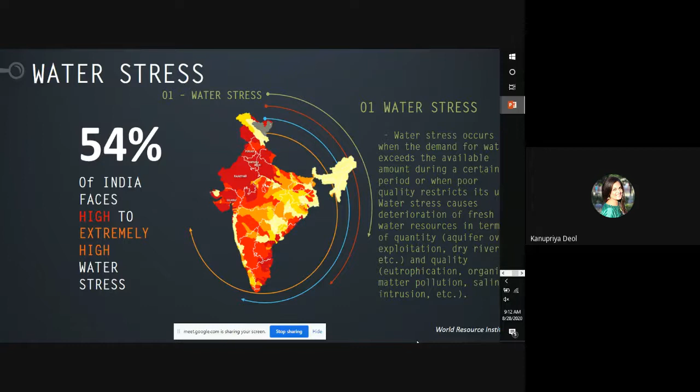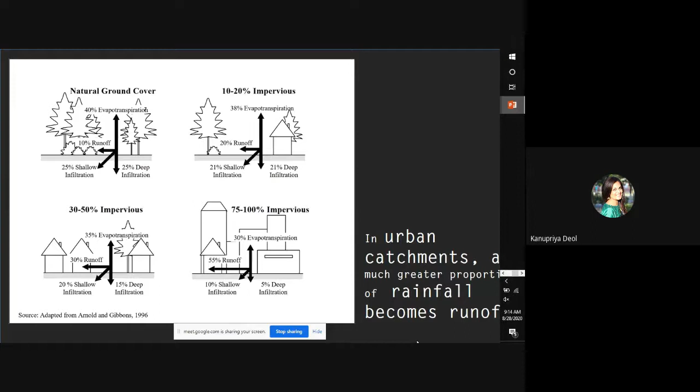With planning, when master plans are proposed or zonal plans are proposed, the proposals are given at a very policy level, but the funding for those infrastructure proposals or development plans is a greater challenge for implementation. Having master plans has been there for us, cities have started coming up with master plans or even DPRs, but with the funding, that is the problem. We haven't yet come up with solutions which are also cost effective.

So that is one implementation challenge we're having. So with these techniques, the focus is also on the funding part.

Coming back, when we have at least 75 to 100% impervious areas, 55% of water is lost in runoff, and only 5 to 10% water goes into infiltration. So the runoff percentage, if you see, the more impervious area, the more runoff. This water which is runoff is lost water.

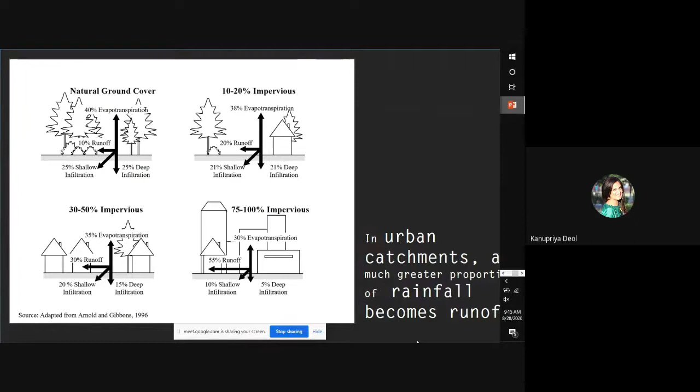So in urban areas, the catchment has a greater proportion of rainfall becoming runoff. We are not able to tap this water. It becomes a nuisance for the city. We have seen flooded urban flooding pictures in Jaipur, Gurgaon, and many other cities. So this becomes a nuisance rather than becoming a resource to us.

Looking at this scenario, there's a need to shift from what is happening currently to a new kind of paradigm, a new kind of approach.

So where water, rather than having a single use, we need to have multiple uses of the gray water and black water. There's a need of reclaiming and treating the water, and probably not for your drinking purposes - probably it is not potable water - but we can use it for other purposes like washing your cars, horticulture, and even street washing.

So regarding water quality, the first major thing is to treat water to potable standards given by CPHEEO.

And then second is, in this new kind of approach, we have to use the right water for the right use. This is something we talk about when discussing sustainable development, smart cities, or having 24/7 water supply - the right water for right use, like there is probably no need to use clean clear water for washing your cars.

Then wastewater is another major thing - it is not to be passed on after one use and just sent back to the environment, dumped in the rivers or dumped in the drains, but rather taken into a loop. In environmental terms, this is called reclaimed water.

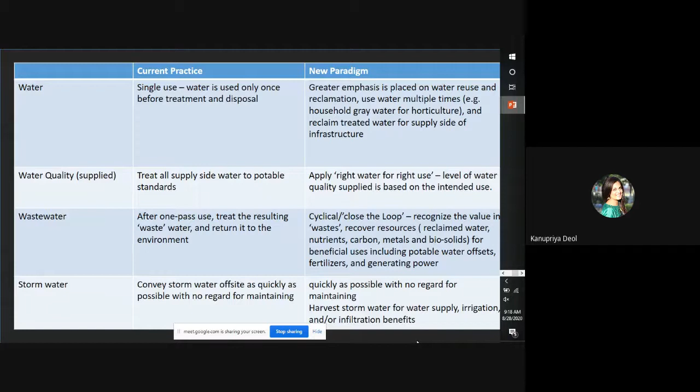This is given by Centre for Water Sensitive Cities, CRC Australia. This is a pioneer institute working towards creating water sensitive settlements, be it on a neighborhood scale. It says that there's a transition framework for every city - every city can be categorized into six phases, and every city passes through these phases.

The first being where you have excess of water, the population is low, the water sources are very readily available, be it surface, be it ground, be it a combination of the two. Then the second is the sewered city, where we come up with separate sewerage systems for public health protection, because with excess use of water, given that when you have too much at your disposal, there is a tendency to waste it.

So then comes the sewered city. Then comes the third phase, the drained city, where in case of Indian cities we did not come up with the framework of designing whether we want a combined sewerage system, a separate sewerage system, or a partial combined system. So in those cases, drainage became an issue. The natural drainage of the city was not given due consideration while planning the land use. The land use came irrespective of the natural drainage of the city, and so urban flooding was a scenario that comes up in a city. The built up density of the city is inorganic in nature.

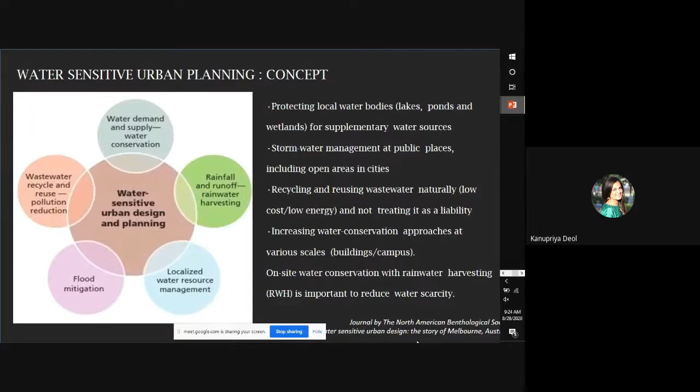Then if we look at how we can achieve it, what are the various components, it's a combination of some sustainable techniques, urban planning techniques, and landscape design. An integration of all these techniques leads us to managing the water cycle and contributes towards sustainability in urban areas. That is what we are striving for. Our plans, our reports, our design aims and objectives mention sustainability, 24/7 water supply, green techniques, green infrastructure. So this is how we are working towards it, this is how things can be achieved.

And the minute we say that we have to ensure a 24/7 water supply for our cities, provide to the standards of 135 LPCD per person -- so these are the various techniques. If I pick up one or two, it again says the same things: keeping in mind the environment, protect the surface water bodies and groundwater. It has become very crucial to maintain that natural balance in the surroundings we are living in, to restrict the use of certain water bodies so that they are not over exploited. But the minute we restrict, we also have to find an alternative technique to overcome or maintain the supply and demand.

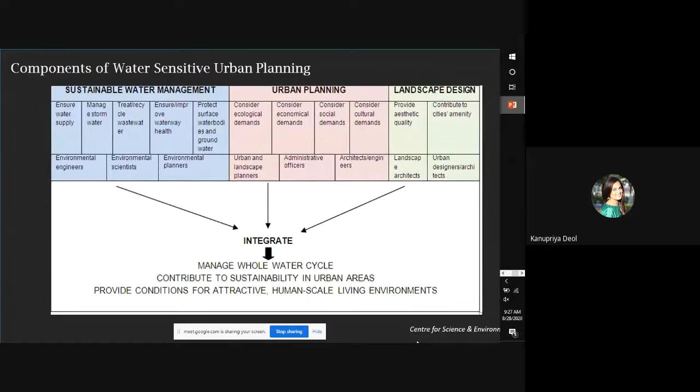So this particular concept is very site-specific. It has to be very sensitive towards the demands and aspirations of the people, and not force or impose techniques over them. At the same time, the techniques we provide should not spoil the aesthetics and should contribute to the assets of the city, without putting up extra maintenance or operation costs.

So if I sum up the entire concept, it is an approach to reduce the potential impact of new and existing development with respect to surface water drainage discharge. The first agenda is to tackle the surface water drainage discharge, and the second is to integrate and optimize the use of available water resources. It focuses on one thing: that we should not look for new sources. Through our design and planning, we should be able to optimize what we have at hand rather than just saying, I'm going to go buy a new one.

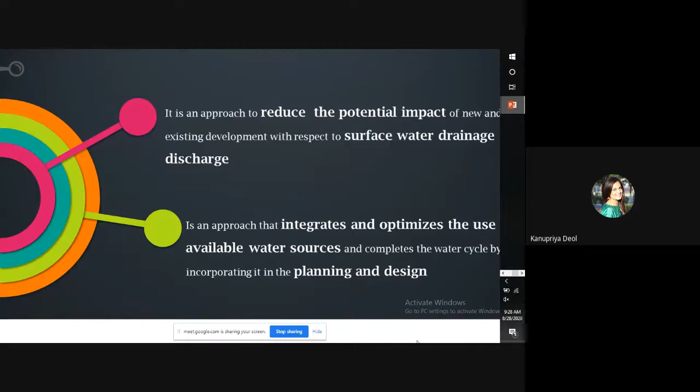Now, working on the principles: consider the receiving waters. We have to break the connection between impervious areas and areas which receive water, use stormwater as a resource, and maximize the benefit. I will explain it further.

This is when we say that we need to respect the sources of water. We need to know that if your water is coming on a slope, in upland areas the buffering capacity is very little. It does not have too much space to meander, and the change in flow and concentration is heavy, it is sedimented, it is under flow.

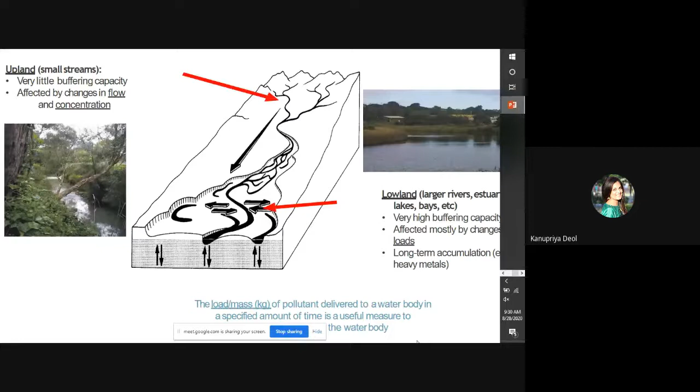So to tap that water, we'll have to construct dams and check dams for these smaller streams. So we wait for the water to come into a little lowland where there is a high buffering capacity. We can store water there, and the heavy metals or sedimentation have already taken place. Depending upon the location of the site or the settlement, we have to see where the water is coming from and what kind of water supply is available for the city.

Now, separating impervious areas from the receiving waters - when we give our planning considerations, the design should be in such a manner that your impervious areas somewhere or the other meet the areas where water can seep in.

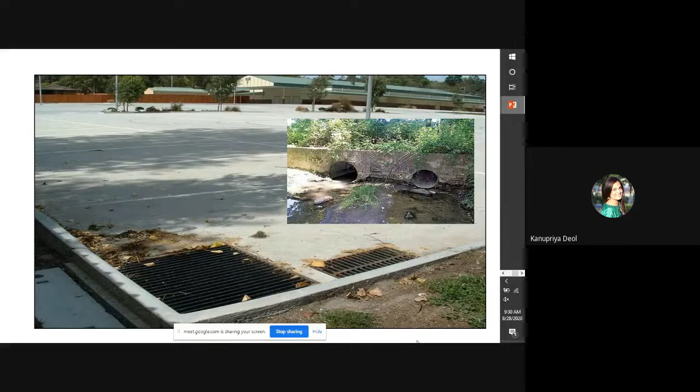And even if there's a complete pavement, there is something called pervious pavements. Civil engineers have come up with the concept of pervious pavements rather than going with traditional pavements. We have to come up with areas where your impervious areas can be efficiently used as pervious areas. If not to the maximum of their capacity, a certain percentage can be used.

Then the third principle says we have to restore the urban water cycle. What comes in is not wasted, and a forested area, which is by default natural, is able to maintain this. But the more the urban area penetrates into forested areas, the dynamics of that place change. Over time, the flow of water which was there initially reduces with the built-up area, and we have to use methods like infiltration and irrigation to preserve this runoff.

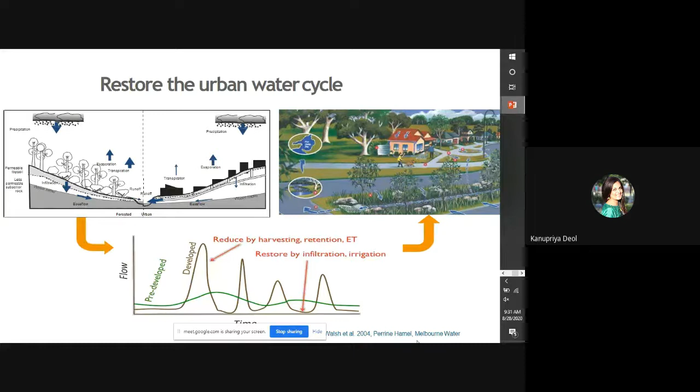Now, when we say it has to be a benefit, there are three dimensions. It has to be a benefit in all three: social, economic, and environment. It cannot just fall into one dimension.

It might be majorly into one dimension, but any technique we come up with for water sensitive development has to fulfill this, because merely saying it helps the social or economic aspect might not be possible. These are the three dimensions, and only if it benefits all three can we approach people, or can city authorities take up certain projects.

So there are techniques which preserve the biodiversity. They exploit the ecosystem goods and services. We are able to at the same time take up resources, and at the same time give it back to nature.

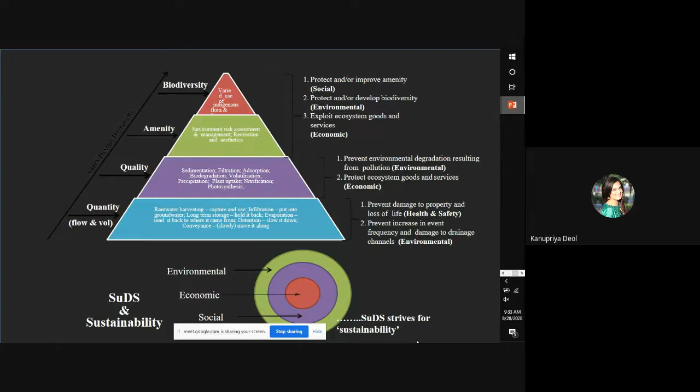When we talk about the environmental risks, the various techniques used to create water sensitive settlements have very calculated risk towards environment, and at the same time work as assets to the city, rather than just being techniques for protecting the water. It also looks at the quality of water provided to the city. It protects the ecosystem, prevents environmental degradation, and the treated water supplied back to the city is measured against health and safety standards, and only then is it given to people to use.

How can we achieve water sensitive urban development? Number one is your buffer strips and swales - also called bioswales. In Australian cities it's called bioswales, in the UK it is called swales. It is alongside the road, small strips created given that we have enough space around the road to remove the coarse and medium sediments.

The sediments settle at the top, giving aesthetics to the street, and it's an alternative conveyance system for the water to seep in if there is a high impervious area. The only restriction is it is limited to mild slopes and interaction with driveways and footpaths, so we will have to separate the traffic from the road shoulders.

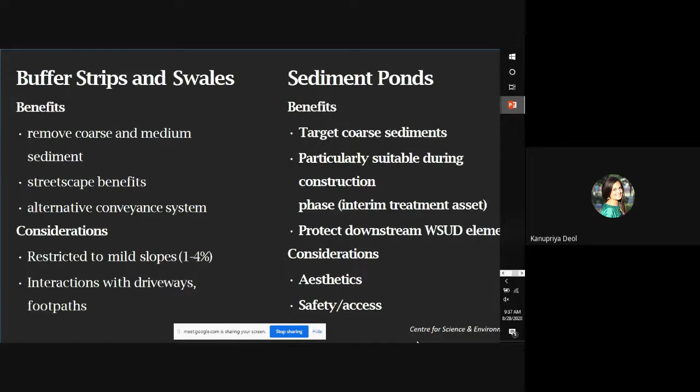Then we have bio filtration systems. The scale can be modified as per requirement. Biofiltration generally comes along the streetscape, as strips of plants with capacities to rejuvenate the nutrient value of the water. The only issue is it is unsuitable where the groundwater is already high, as the sediment may clog the filter media, and there can be inlet blockages.

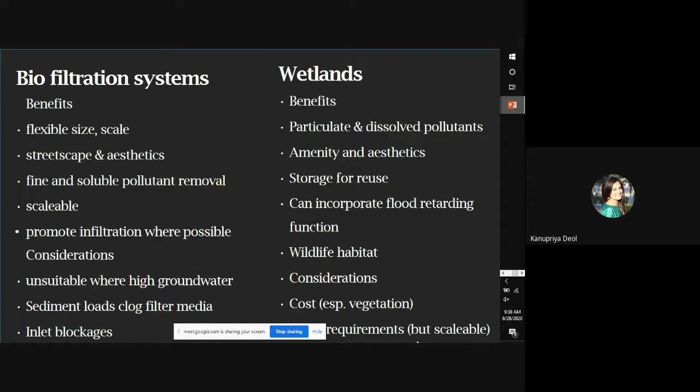Next we have wetlands - small man-made areas which you can develop as wetlands. The particulate and dissolved pollutants can be used, and there are special kinds of plants suggested for the development of wetlands. They incorporate a flood retarding function, but the cost is a consideration here.

Then lastly, we have rainwater and stormwater harvesting. This is along with other techniques - an area might have a combination of 3 to 4 techniques. With rainwater and stormwater, I won't go into the details, as everyone is much aware of what generally happens. It can happen from a building level, but it becomes difficult to judge the kind of storage we need, and whether for a particular zone we will have to calculate the runoff, the kind of rainfall that is happening, the intensity of the rainfall, and then create the infrastructure.

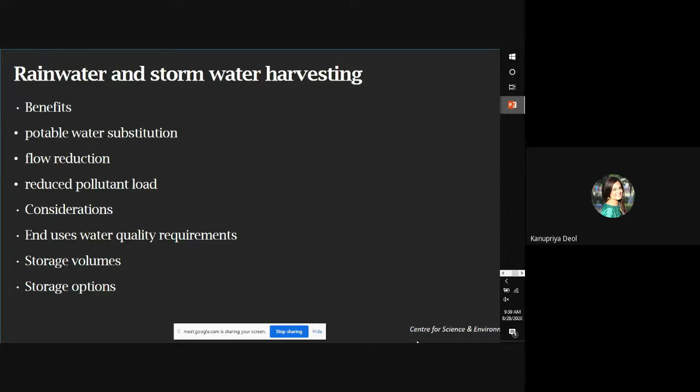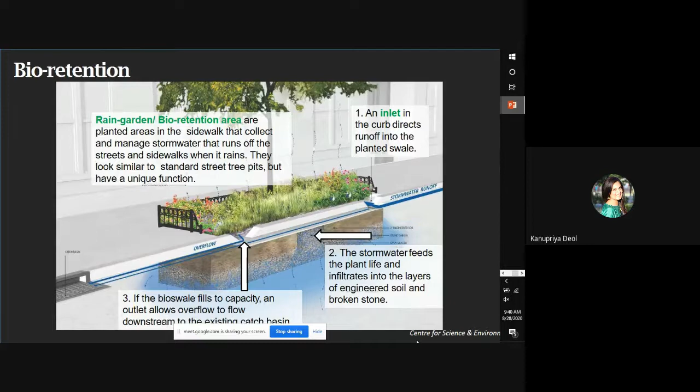Now, to achieve these techniques, talking about the intervention in different planning scales - how it can be done. When we have our master plans, which are documented for 20 to 25 years, or the city sanitation plans and the CDPs, we no longer have CDPs, the water bodies, the recreation areas, the land use can be given in such a manner that in future we know these are the areas more prone to having stagnant water.

Then at zonal level, we can use the location of parking lots, parks, open spaces, so we need to make sure these can be served with all the water sensitive urban development and planning measures, and establish a template for the entire zone because they generally have homogeneous characteristics. DPRs are prepared for water supply and sewerage.

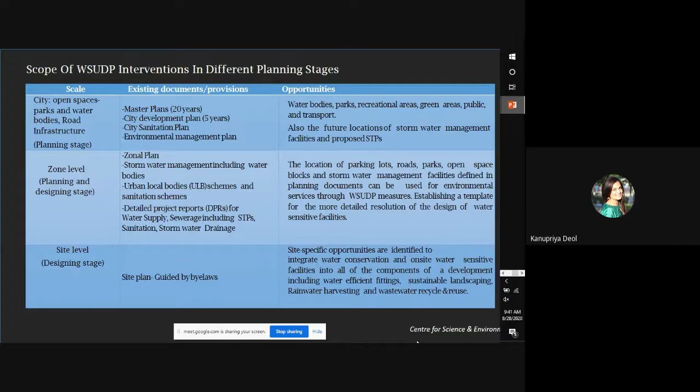Then at site level, there are very site-specific opportunities for on-site water-sensitive facilities, and how we can recycle and reuse this water. If we look at the land use structure of urban centers, this is generally given by URDPFI for small towns, medium and metropolitan or large cities. The residential cluster occupies the largest share of the land use.

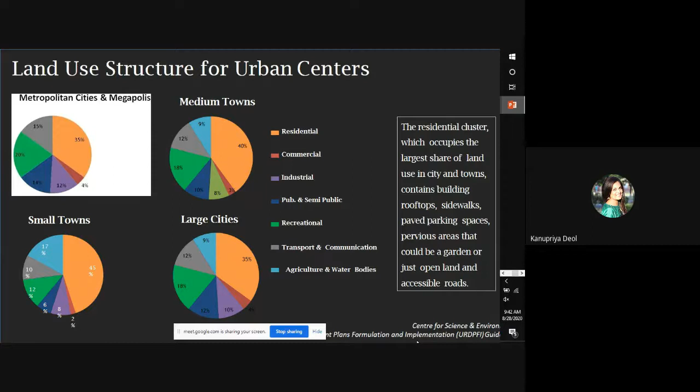So once we have residential clusters, we have rooftops and sidewalks, so we do have a lot of area available for the application of these techniques. It is just that we will have to come up with very customized solutions, unlike what we've been doing in the past of just giving generalized things. So it has to be incorporated at master plan level and designed at a DPR level.

So this is what an existing water sensitive neighborhood looks like, where your collector roads or access roads have bio-infilters, transitioning from an impermeable roadway to permeable roadways, serviced with sustainable drainage systems, which in terms of water sensitive development is called SUDS. So we talk about giving bioswales along the roadside and inlet channels for water to penetrate in.

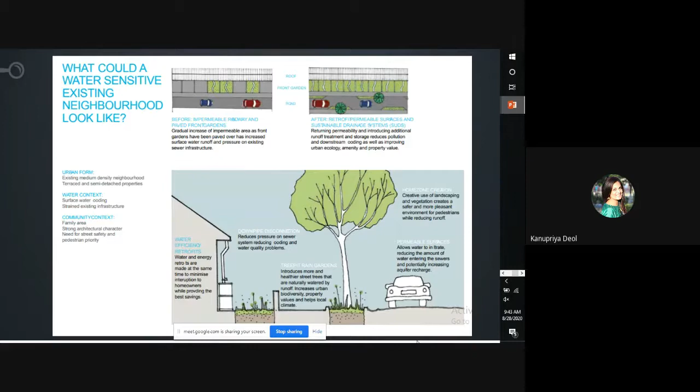Over time, storing that rainwater is also a challenge. So we have to calculate, and also at the same time, how is that water going to be disposed? There has to be a balance between that. Once we integrate residential, commercial, and institutional areas - I have yet not come across standards for institutional areas.

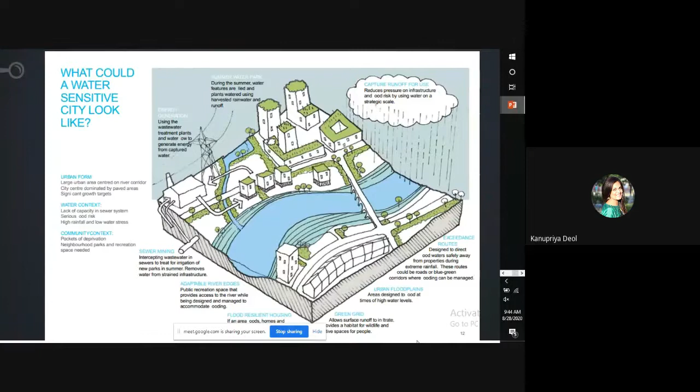So with the water sensitive city, the river corridors of your cities can be kept, and impervious areas around your corridors can be designed into pervious areas. The capacity of the sewer system should not be risked - it should be calculated on actual numbers. Low water stress is what we should aim at. So this is how a water sensitive city can look like.

Coming on to the general recommendations, to begin with, then the specific considerations. The general recommendations a city can come up with are groundwater regulatory measures, then rooftop rainwater harvesting. Government buildings at least can come up with these techniques.

Investment in updating the distribution system and metering. As per the standards, the average life of any water supply system within a city is 30 to 35 years, designed for that given the growth rate of population. But we have systems which are 65 years old. They have a lot of maintenance issues and transmission losses.

So that is something we need to update, where with the help of GIS we can pinpoint the areas where water leakage is happening. There are techniques developed for this, you can put water pressure meters and judge. This updation in the Indian system is yet to happen. It is happening on a neighborhood scale, but on a city scale, where we have a combination of old and new areas, this is yet to come up.

Then increasing the open areas - I'm still compiling the data for the percentage of open areas as compared to the land use, the URDPFI standards and the city open areas. So we need to standardize the open areas that we have, conservation of existing water resources, and minimizing use of fresh water in industrial areas. We should not use water which can be effectively treated and used as potable water for other techniques.